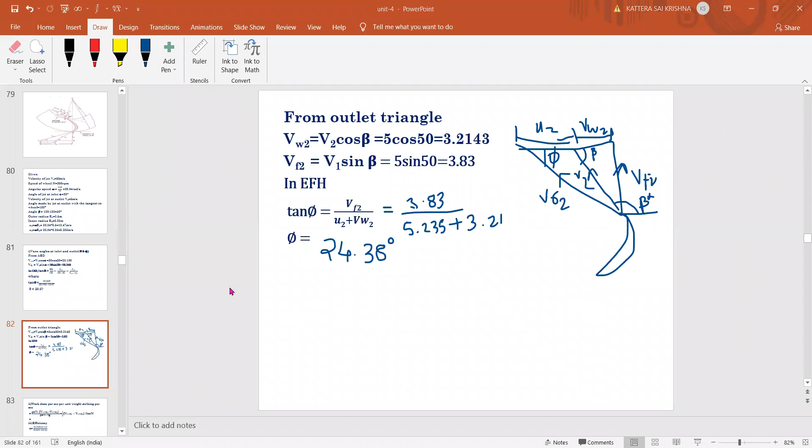So we got phi here, phi equal to 24.38 degrees. So what he asked in the question is to find the vane angle at inlet and outlet. Next he is asking work done per unit weight of water.

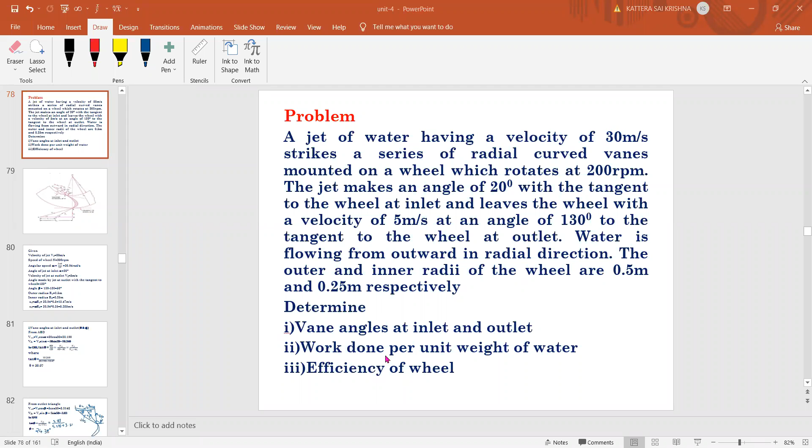We are going to calculate work done per second per unit weight per second. The formula is this one: work done per second per unit weight striking per second. So what he asked is work done per unit weight, so per second will be getting answered. Already we know work done per second is this one for this series of blades.

Rho A V1, nothing but rho A V1 mass per second, into VW1 U1 plus VW2 U2, divided by mass into G gives weight, mg. What is asking? Weight. So m into g, mass per second into g. So what you'll get, rho A V1 gets cancelled. So 1 by g into VW1 U1 plus VW2 U2 will give you work done per unit weight. Please substitute the values here.

So 1 by 9.81 into VW1 U1. VW1 is 28.19, into U1, 10.47. So this is VW1 and U1, plus VW2, 3.214, into U2, 5.235. If you do this, you'll get work done.

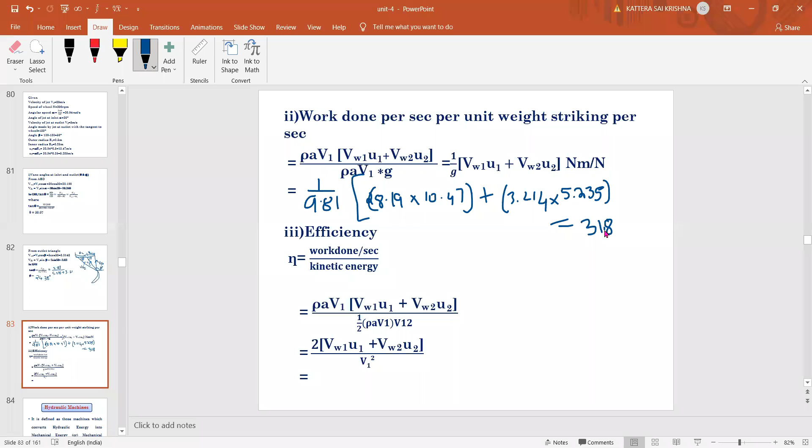So what is the value? 31.801, so 31.8. Remember the units: work done per second is Newton meter per Newton, Newton meter per weight again. So Newton meter per Newton, work done per second per unit weight striking per second.

Next, you can calculate efficiency. The efficiency formula you already know. If you are unable to remember this value, you can remember it this way: work done per second by kinetic energy. So this is rho A V1 into V1 square. Half mv square, that is the thing. Kinetic energy is given by half mv square.

Substitute the values. Rho A V1 gets cancelled. So 1 by 2, the 2 will go upside. So 2 into this value.

Tell me the efficiency value. So efficiency is 0.69, right, 69.32%. So what we'll get is 0.6932. If you want efficiency, you can show it in percentage by multiplying it by 100.

So if you have seen this, this is the thing mostly you'll be asked for this series of vanes - that is efficiency, work done, and inlet velocities, sorry, vane angles, theta, phi, everything. The only concept difference is we'll get two values, U1 and U2, separately. So everything is the same as your single blade only.

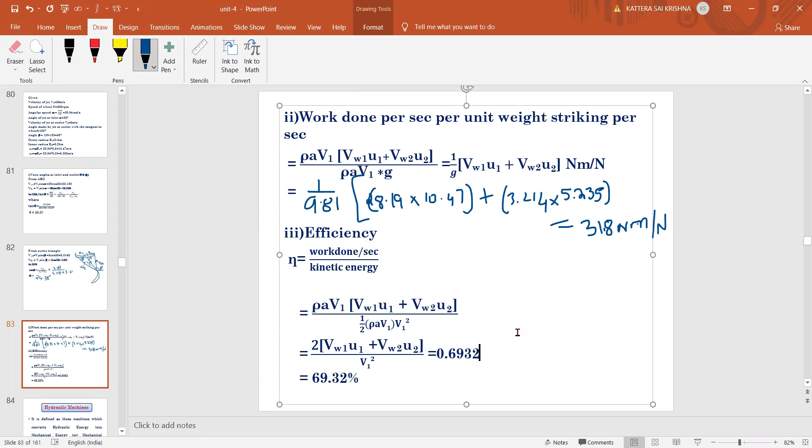Right, so if we completed this, half of this unit will be over. Next we'll have our turbines topic. Can I go for the next slide? Right, so next thing we are going into the main of the fourth unit, second half of the fourth unit, that is turbines.

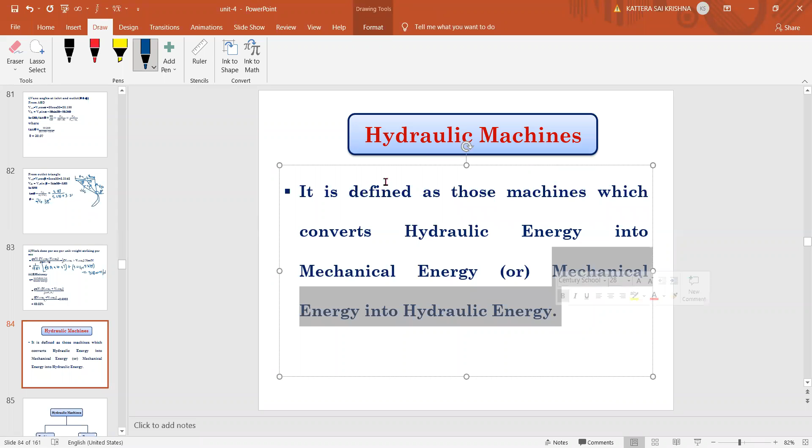Already we know hydraulic machines is defined as machines which convert hydraulic energy into mechanical energy or mechanical energy into hydraulic energy. Under hydraulic machines, both will come - turbines as well as pumps - where turbines convert hydraulic energy into mechanical energy, and pumps convert mechanical energy into hydraulic energy. That is the difference. So both come under your hydraulic machines.

So now in the fourth unit, we are going to learn about turbines, and the fifth unit will be about pumps. These are examples of the turbines which we learn in this chapter: it is Pelton wheel, Francis turbine and Kaplan turbine will be the things which we'll learn here. And in pumps, we have these things: reciprocating pump and centrifugal pumps.

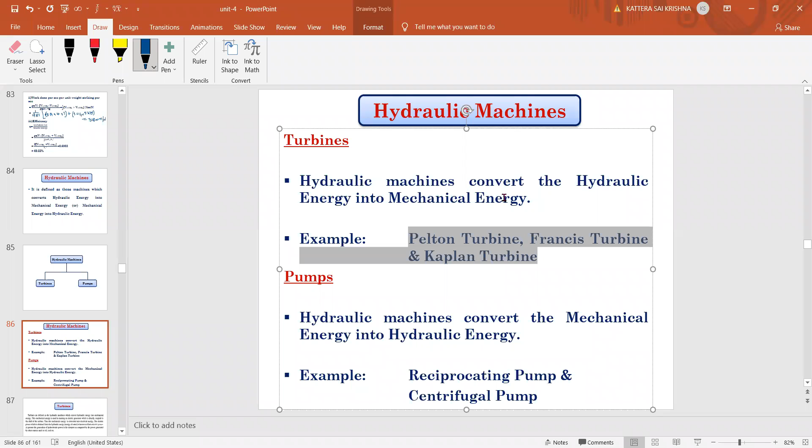So what is a turbine? Turbine is a hydraulic machine which converts the hydraulic energy into mechanical energy. So today we'll start with some basics before starting the original turbines. Turbines are defined as hydraulic machines which convert hydraulic energy into mechanical energy.

And this mechanical energy is used in running an electric generator, which is directly coupled to the shaft of the turbine. So directly electricity is not produced. The mechanical energy is then connected to the generator where the current is produced, nothing but where the power is produced. So what's happening is the mechanical energy is again converted into electrical energy.

So the electric power which is obtained from the hydraulic energy is called hydroelectric power. At present, the generation of hydroelectric power is the cheapest as compared to power generated by other sources such as oil, coal, etc. This is the basic introduction of what a turbine is, what hydraulic power is - everything is seen here.

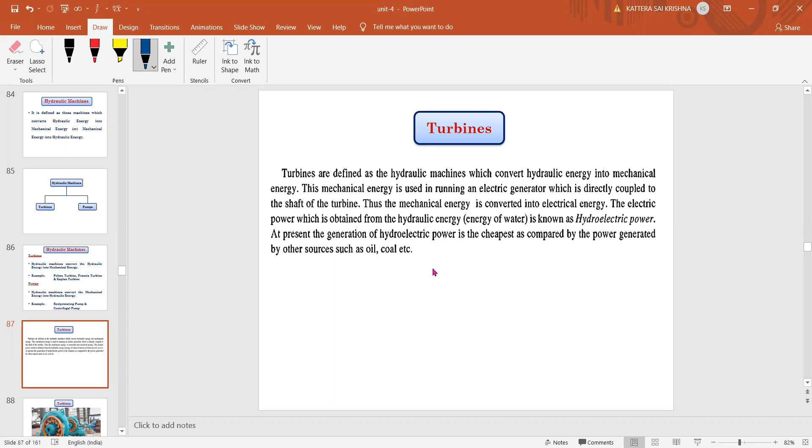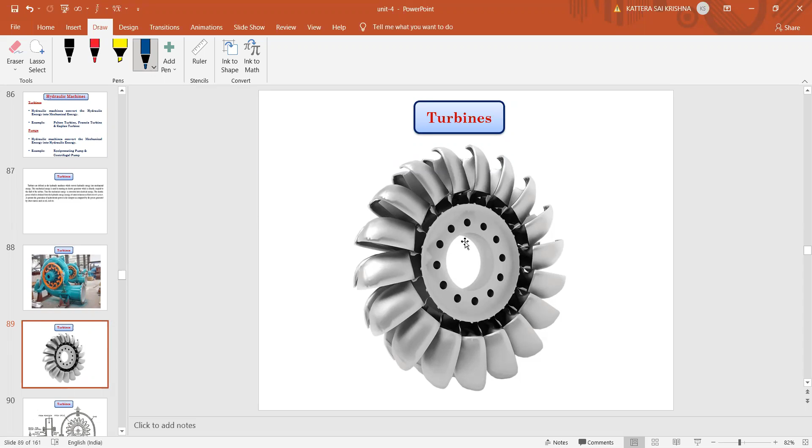Okay, so these are the different shapes here. Hemispherical, cup shaped - there are different types. And this is the first type of turbine which you are going to see: the Pelton wheel or Pelton turbine.

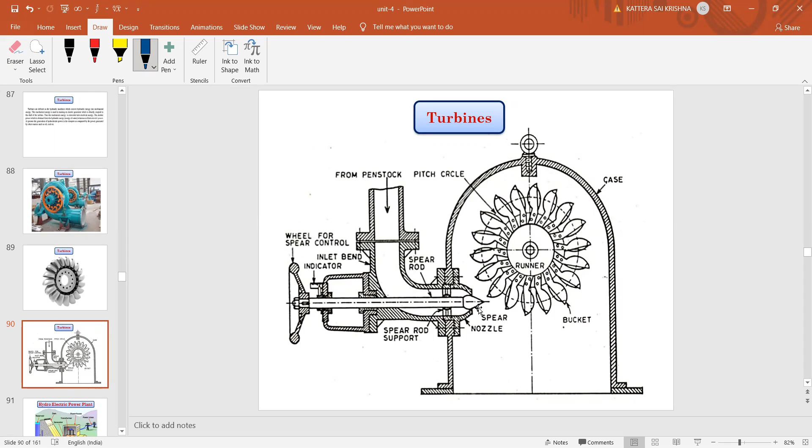Right, this is a basic diagram. No need to draw all these things, I'm just showing what it is.

So already we know what is a hydroelectric power plant. Where it will be there, and in reservoirs, there will be connection of big larger pipes made of steel or some metals or concrete, which is called penstocks. So from there the water will be supplied to the turbine here.

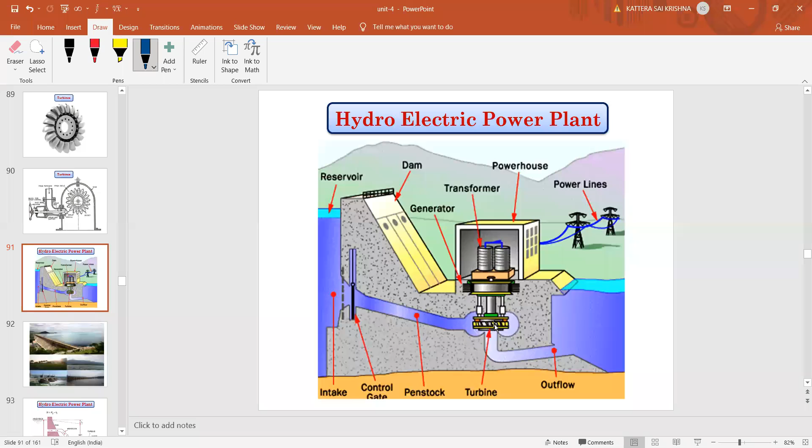Right, so we are going to study about this part - what is that? Turbines.

Okay, so this is our hydroelectric power plant. Why are we seeing this? Because we need to know this - what is H, HG, and HF, everything. So here H is nothing but head, water head - how much height of water is available in the dam or the reservoir.

A dam will be constructed across a river or storage water where water is available. So what happens - from that water, a pipe of larger diameter called the penstock will carry water under pressure from the storage reservoir. This is called the reservoir - backside of the dam will have our reservoir tank or reservoir water. From there, the water is supplied to the turbine by use of this penstock.

These penstocks are generally made of steel or reinforced concrete - nothing but concrete or steel pipes. Turbines having different types of vanes will be fitted to the wheels. Different types of vanes will be there, fitted to the wheels.

After the water coming from the nozzle, which is attached to the penstock with high velocity, hits the blade, that water will be collected in a tank called the tail race tank, or the collecting tank. Inside that tank, there will again be water filled, and that height is called the tail race.

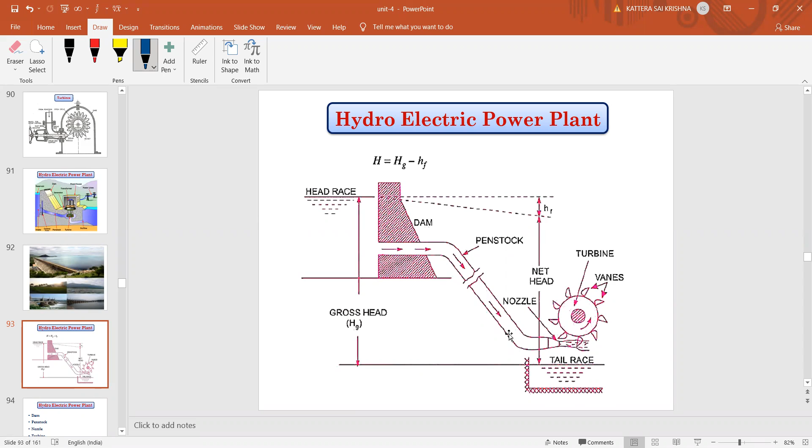So H equals Hg minus Hf, where H is the net head available for the turbine, Hg is the gross head, which is the height of water at the backside of the dam, and Hf is the loss of head happening in the pipe. This much height of head is lost because of the friction. These are the parts or things available in a hydroelectric power plant.

What is that? Dam, already we know, it is a concrete structure constructed for storing water. Next, penstock is a large size pipe used for supplying water from the dam to the turbine, made of either steel or concrete. Next, nozzle, already we know its purpose: to increase the velocity of the jet of water. Next, the turbine, and the tail race, already said, the water coming after hitting the turbine blades should go somewhere, and that is the tail race.

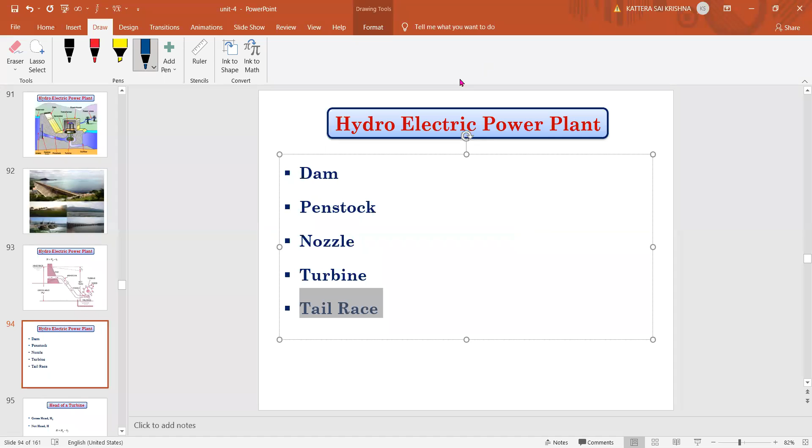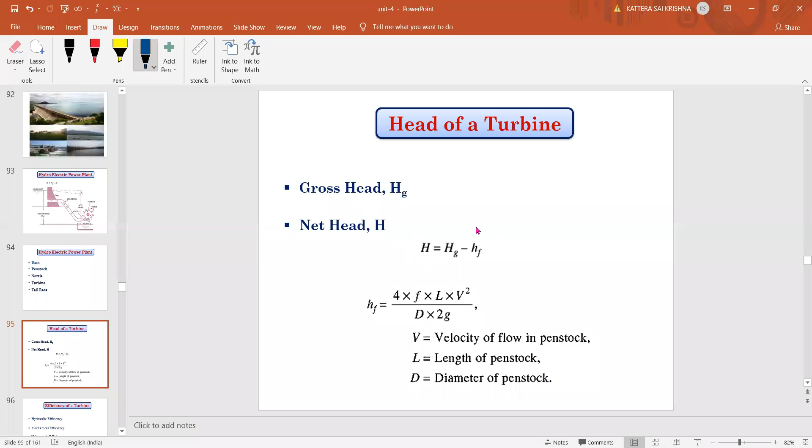Yes, can you hear me? Yes sir, yes sir.

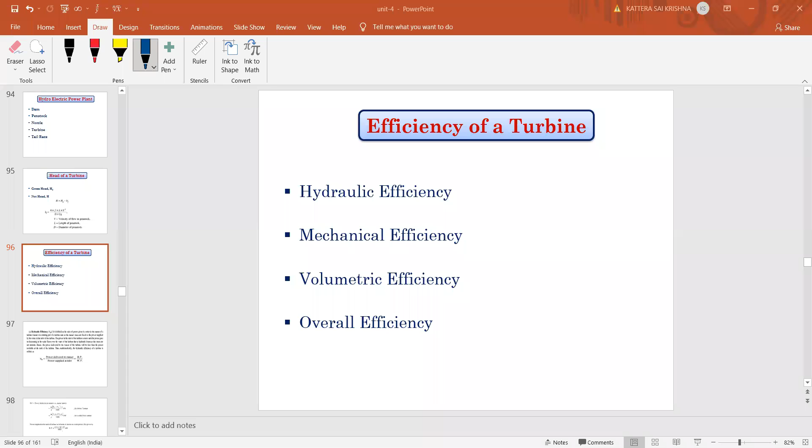So first we'll see hydraulic efficiency. It is the ratio of runner power to water power. Hydraulic efficiency is defined as the ratio of power given by the water to the runner of a turbine to the power supplied by the water at the inlet of the turbine. So hydraulic efficiency is given by RP by WP, where RP is the power delivered to the runner, which becomes the output power for the turbine, and WP, the supplied power, becomes the input power. So we need to know what RP and WP are. RP is the power delivered to the runner, that is, the power given to the turbine blades.

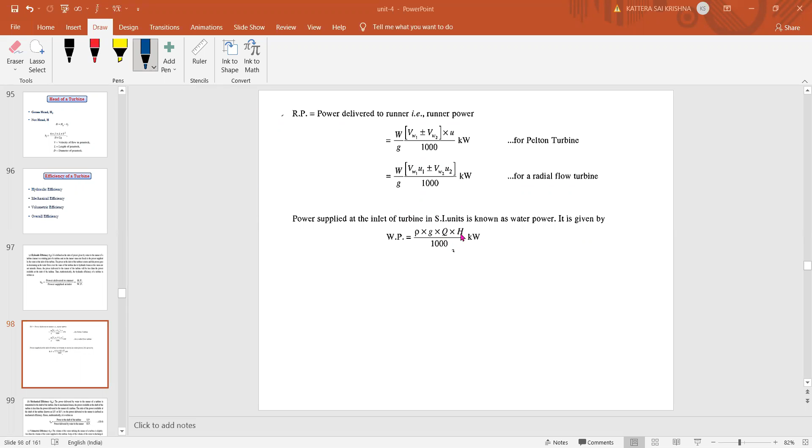This is the power supplied at the inlet of the turbine in SI units, known as water power. It is given by rho G into Q, where rho is the density of the flowing fluid, G is gravity, Q is the discharge, and H is the net head of water available. This gives us the hydraulic efficiency.

Next we have mechanical efficiency, which is the ratio of shaft power to the runner power. Then we have volumetric efficiency, which is the ratio of volume of water actually striking the runner to the volume of water supplied to the turbine.

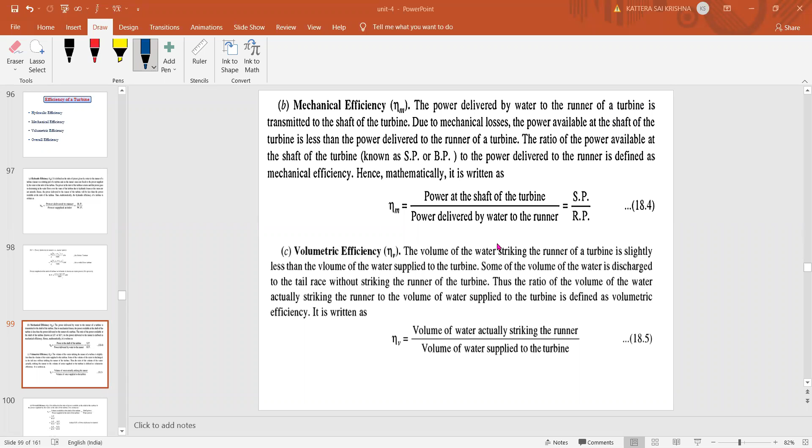Okay, so these are the things. Next we have overall efficiency. It is defined as the ratio of power available at the shaft of the turbine to the power supplied by the water at the inlet of the turbine. So overall efficiency is nothing but the ratio of shaft power to water power, SP by WP.

We can write shaft power by water power also by multiplying with runner power: SP by RP into RP by WP. SP by RP is mechanical efficiency, and RP by WP is hydraulic efficiency. So overall efficiency equals the product of mechanical efficiency and hydraulic efficiency.

Then water power, we already know the formula: rho G QH by 1000. So shaft power will be given as capital P. So P by water power, if you compute, gives you the overall efficiency. So this is about the types of efficiencies of turbines.

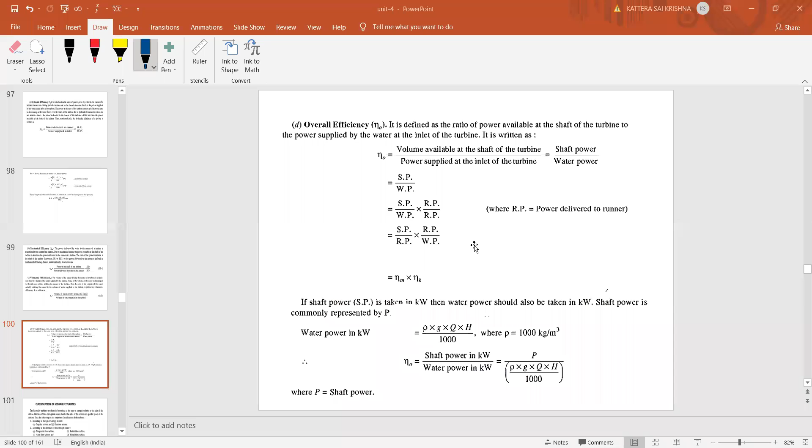Okay, so in the next class we'll go with the Pelton wheel. Before that, we'll see the classification of hydraulic turbines. These classifications depend upon the energy available at the inlet - the first type is based on the type of energy available at the inlet, whether kinetic or potential energy will be present.

If it is an impulse turbine, only kinetic energy will be available at the inlet of the turbine. For reaction turbines, you can see both pressure energy as well as kinetic energy at the inlet. So if you have only kinetic energy at the inlet, it is called an impulse turbine. If you have both kinetic and pressure energy at the inlet, it is called a reaction turbine.

Next, according to the direction of flow through the runner - from the jet, how the water is coming and hitting the vane, we need to see the direction of flow. In tangential flow, that is one type. Next is radial flow turbine, axial flow turbine, and mixed flow turbine. So these are according to the direction of flow - whether the jet flows tangentially, radially, axially, or in the mixed flow direction.

Next, according to the height, or head, at the inlet of the turbine. It may be a high head turbine, like at the backside of a dam with more head of water - depending on the height of water, we need to use the appropriate turbine. So this is high head turbine, medium head turbine, and low head turbine, according to the head of the turbine.

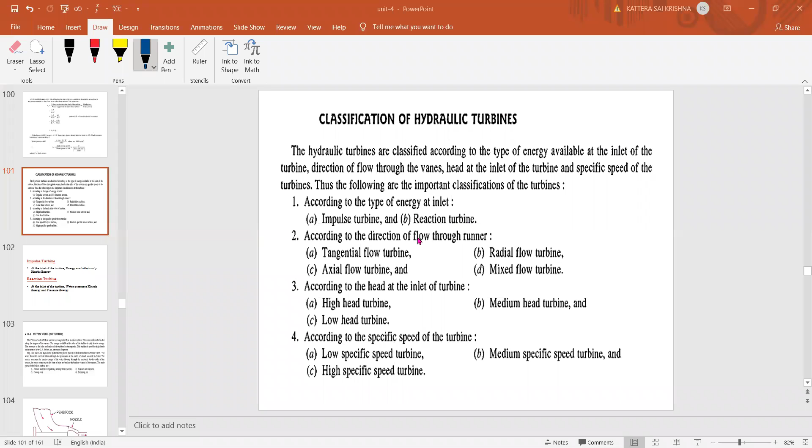At the inlet of the turbine, if only kinetic energy is available, then the turbine is called an impulse turbine. For a reaction turbine, we have both energies - potential energy as well as kinetic energy - at the inlet. So impulse turbine means only kinetic energy at the inlet, and reaction turbine means both kinetic and pressure energies. The Pelton wheel or Pelton turbine will start in the next class.